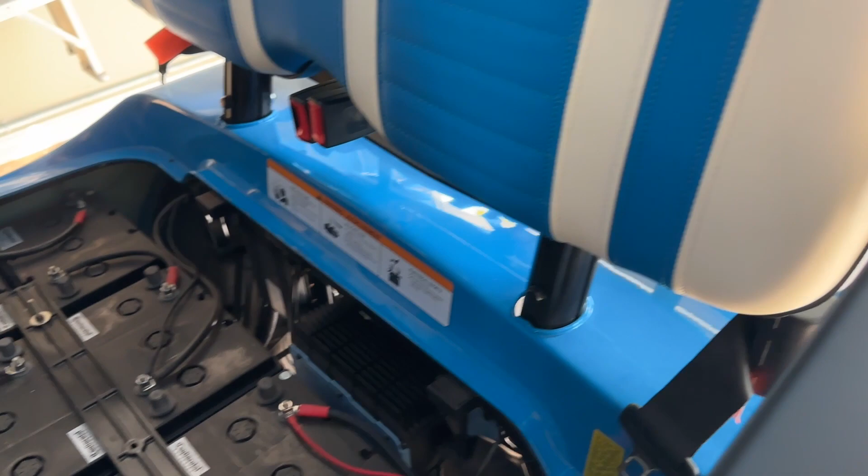So this video is going to be for those guys that want to get a little bit more out of this thing. Open up the back of your battery compartment, buy your cable from the eBay seller in my description, hopefully he's still making them, and plug it in right here, right next to your run-tow switch. You can see the white cable I have here plugs directly into that port.

It's long enough to reach under your seat and through your front seat, and you're going to need a laptop or PC. I find PC is better than the Mac version of the software. Let's go around to this side and I'll show you what you do.

So you plug it all into your computer, and your cable comes with a little piece of paper that says to change your CAN baud setting, your bits per second on the CAN baud, which is right here, to 38,400. This is found by typing Device Manager on your computer, browsing to ports, USB serial port COM3, and in port settings this must be changed to 38,400 or your cable's not going to communicate with your cart. Once you do that, hit OK.

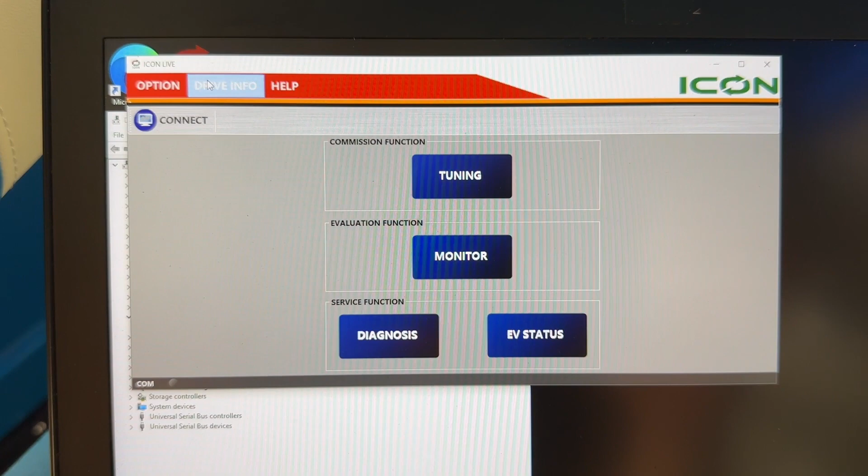Go ahead and turn your cart on. The cart will click on, and now we launch the Icon Live software, which again is another big controversy. You've got to browse Google and forums and everything else to find a copy of this. I guess this is like some secret software you're not allowed to touch. I don't know, it's ridiculous.

So I can't put a link to it because I'll probably get in trouble by the Icon police. Search 'Icon Live software' if you've got a 2022 or 2023 Icon. It's all going to be the same stuff.

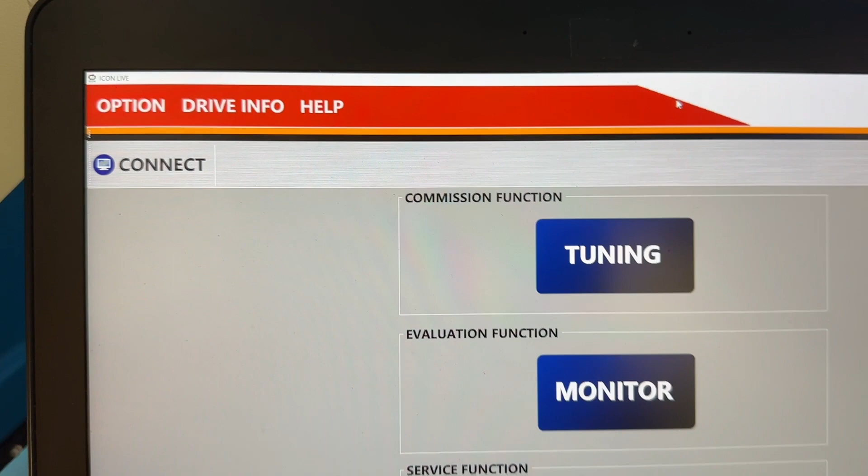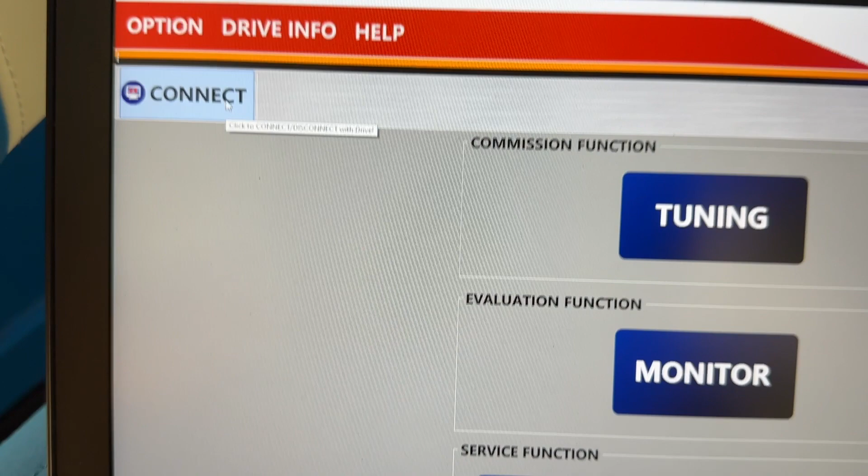Once your software opens up, you'll get to this screen right here. Now you're probably going to be tempted to just jump into tuning or monitor, but none of these things are going to work, and it's going to frustrate the crap out of you. You have to go over here to connect and hit connect first. It'll go from red to green. Right here, down here where it says COM, it means communicating, it is green, it's ready to go. So let's jump into tuning.

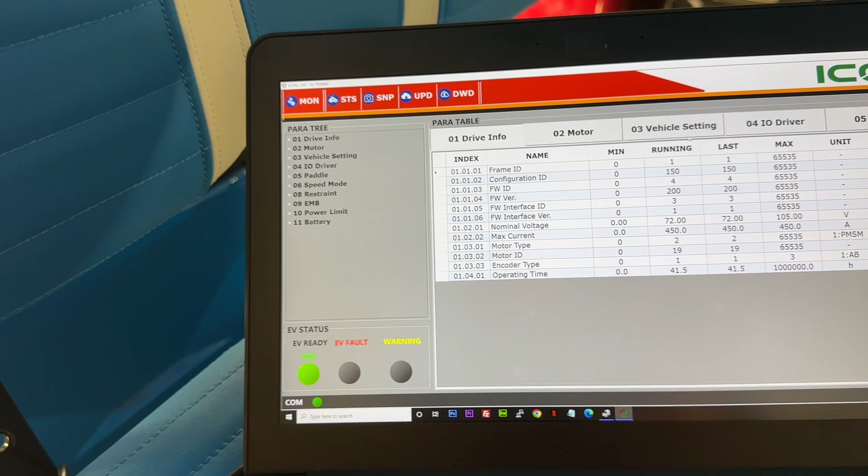You guys are probably watching this video because you want to make your Icon golf cart faster, so I will save you a lot of frustration. You're going to have a bunch of tabs up here, you're not going to know what any of this stuff means, and you're going to start Googling stuff. So I'm going to cut all that stuff out for you.

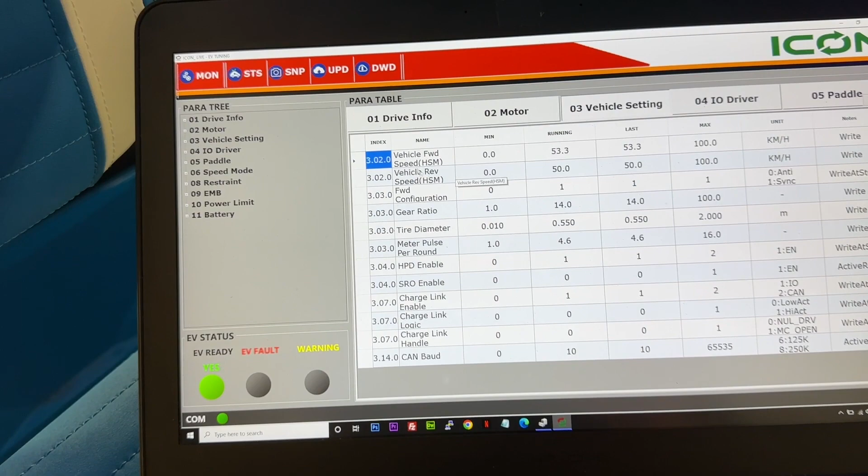Go to your settings, but you're not going to mess with any of your motor stuff. This will brick your cart, so stay out of there. Go to vehicle setting. You are going to change your vehicle forward speed, high-speed motor, and reverse high-speed motor. This is how fast your cart's going to spool up in forward.

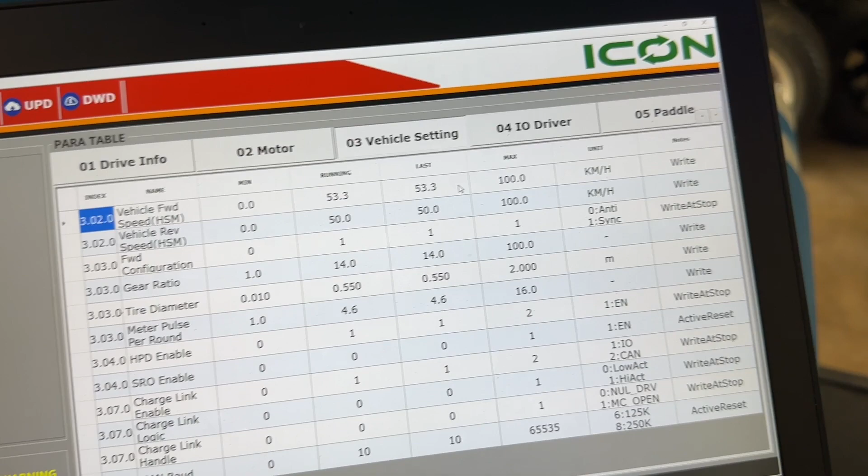They're saying it's set to kilometers an hour, meaning, the settings are silly, like you're going to hit 53.3 miles an hour. The highest you can set this to is 100.

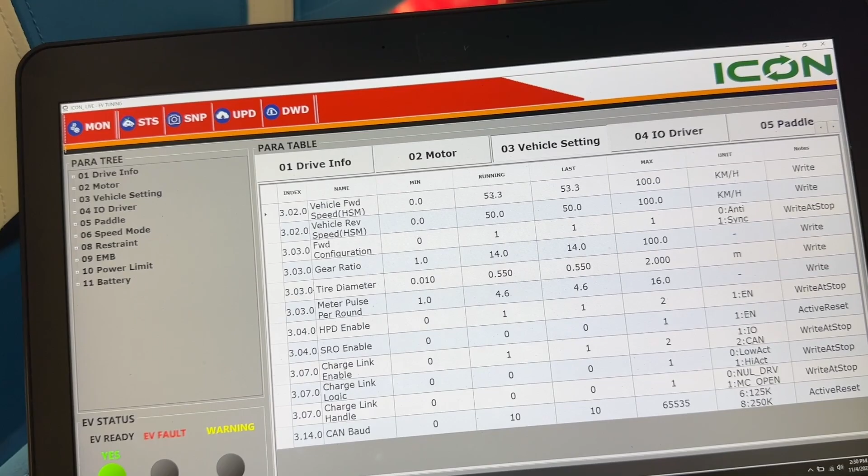So the parameters you're going to change is your running numbers. If I double-click on this, I think from the factory mine was set to like 35, which basically means the cart's going to go like 25 miles an hour. Most of these carts just go 25 miles an hour. First thing you're going to change is change this to 53.3.

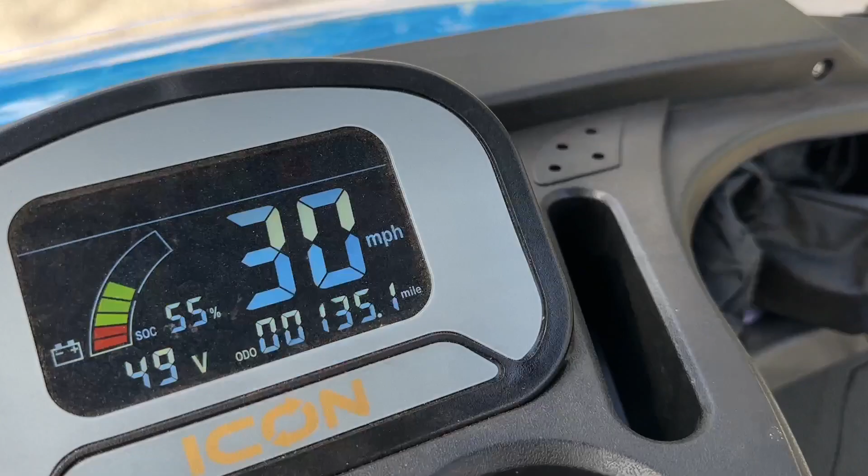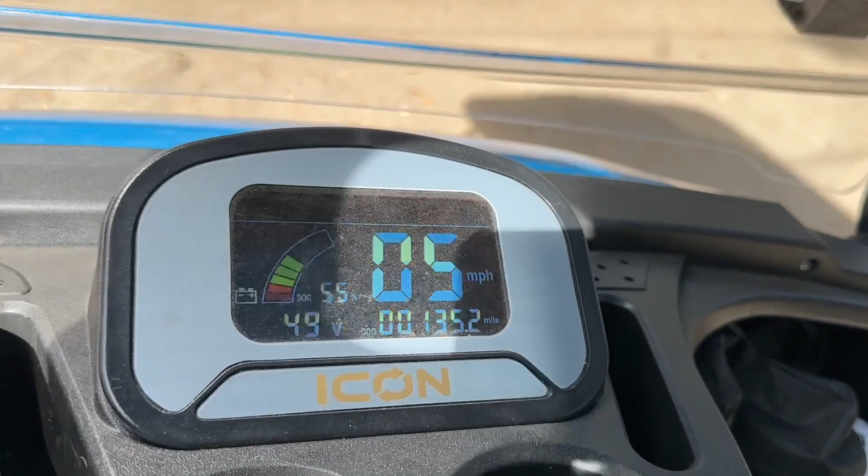As you can see there, I got 30 mile an hour on a longer straightaway. I got about half a battery. You'll get 32, 31, 32, sometimes 33 on a maxed out battery. But again, that's not going to be your common norm.

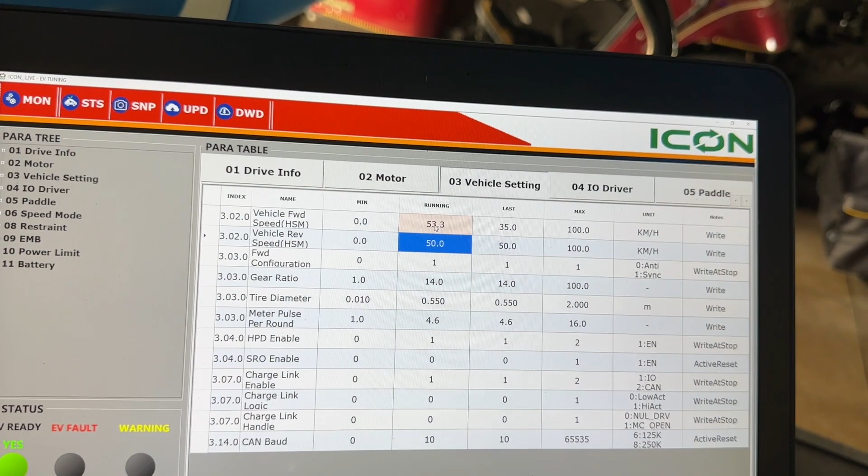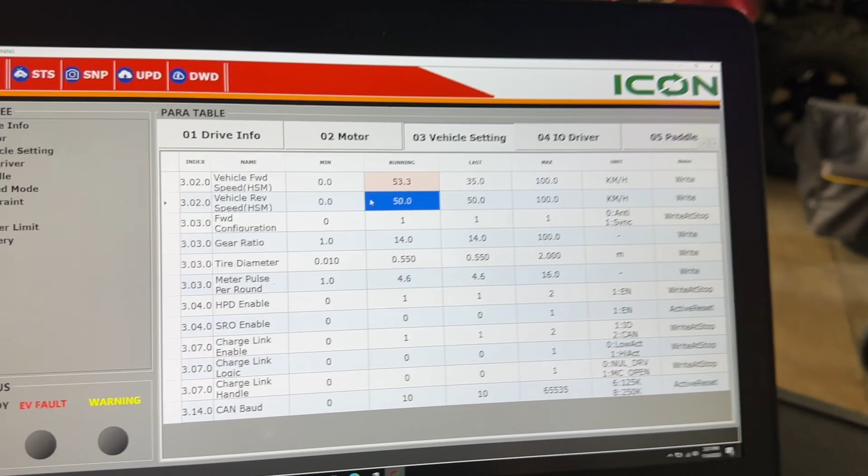53.3, enter, and it's going to turn red. That means that your setting is made, but it's not uploaded. This is a setting that's changed from the last setting, and once you power cycle your key on and off again, it's going to be back to default unless you hit one of these buttons up here, but I'll explain those in a minute. So change your running to 53.3.

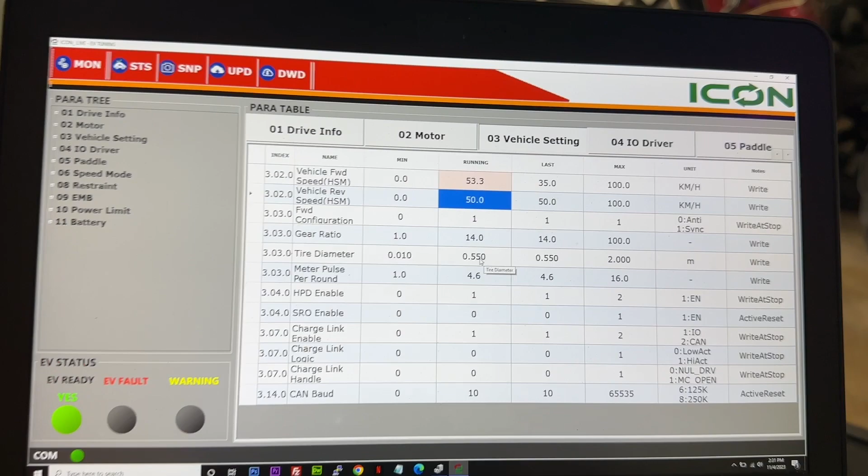You can type in 100, but it's just going to default back to 53.3. Don't mess with any of this stuff, gear ratio, tire diameter, your pulse. Don't worry about any of that. Don't worry about I/O driver. You're not going to be messing with your input and output voltage, so don't worry about that.

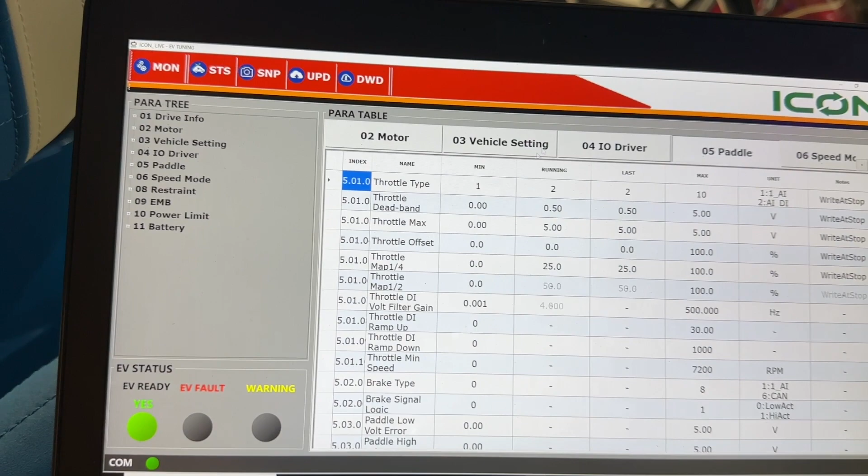Paddle. This is the next thing I changed on mine. Throttle deadband, leave this alone. Throttle max, change that to 5. I think mine was 4. Offset, do not mess with that, that'll break your cart. Throttle map quarter.

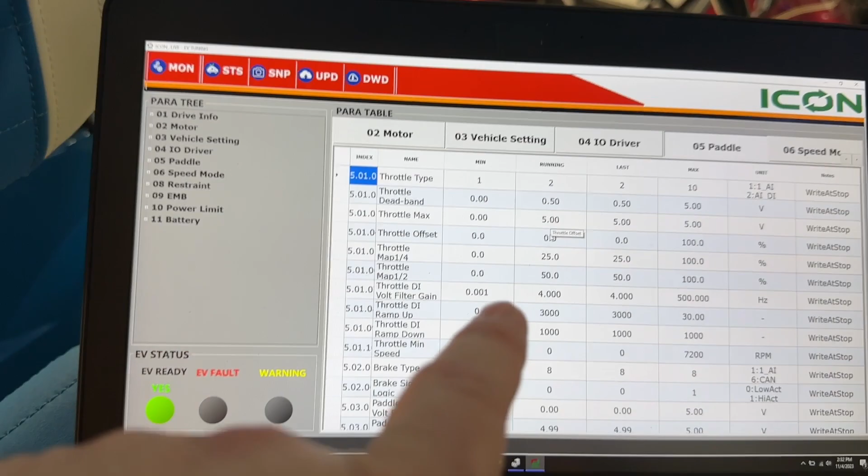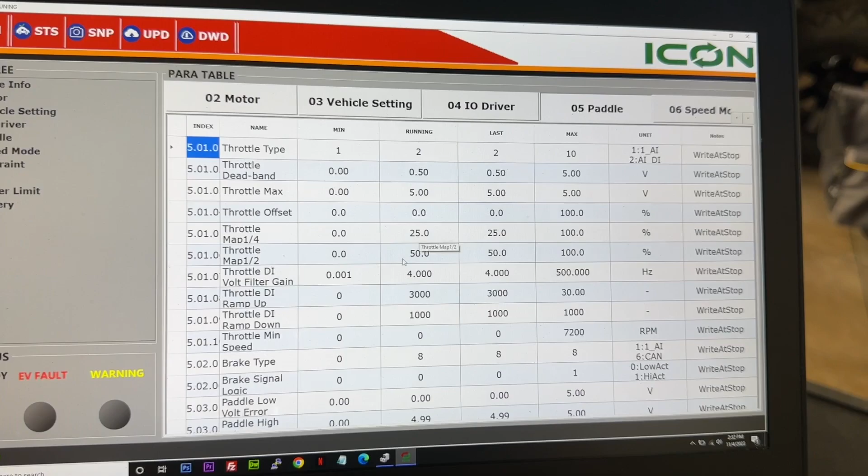Mine was set to 15%. I changed this to 25%. Throttle map half, makes sense, 50%, which is 50. These two are basically, like a DC cart is great, the farther you push it down, it just uses a potentiometer, it changes the voltage throughout the entire band. This uses a computer to do it. So quarter throttle is 25%, half throttle is 50%. So that's basically what that means.

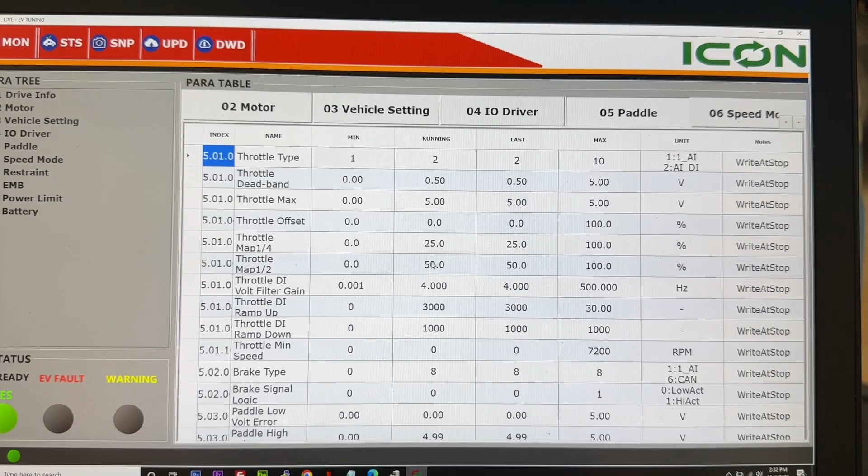So you're going to change those. Take a picture of my settings. This is going to make your cart go 30 to 32 mile an hour. So this is where I have my settings at.

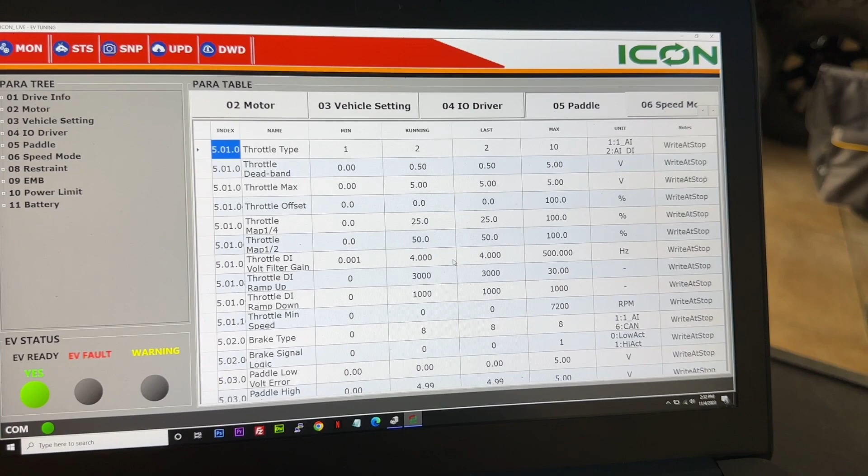Do not mess with this DI volt filter gain, you're going to brick your cart there. I think you can get a little more performance out of it, but I don't mess with this.

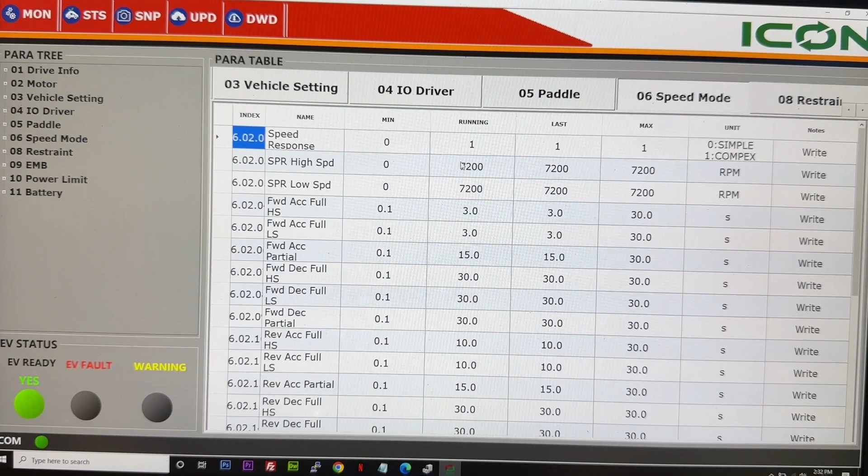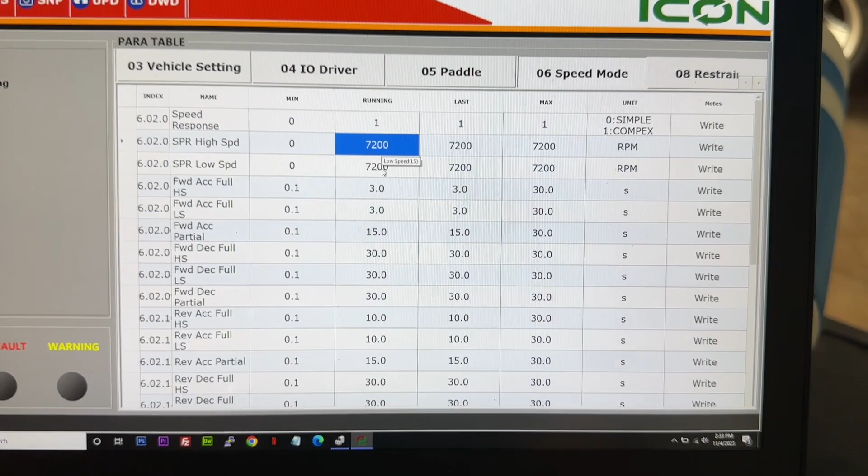Speed mode. This is what I'm working on mine right now. You're going to change your running high speed and low speed RPM. I believe mine was 5,000 from the factory, yours might be different. Change it to 7,200. High speed and low speed are the same on my cart. I don't have a high speed, low speed switch, so I try to make sure that all those parameters match.

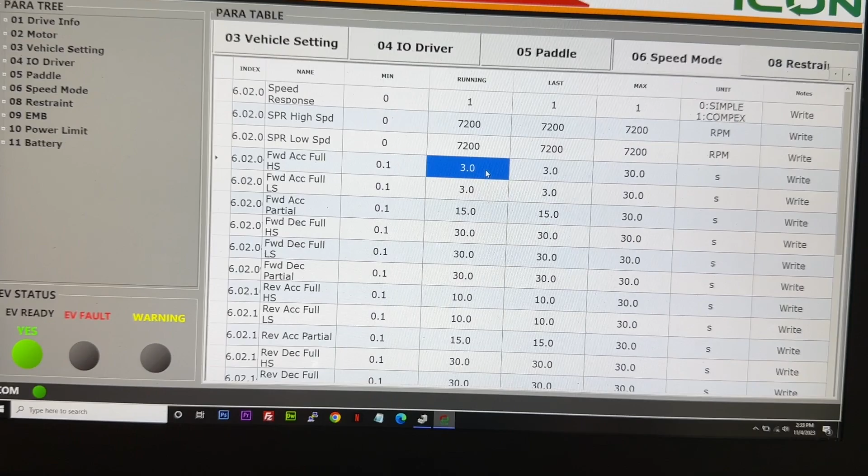So this is your acceleration, this is your performance off the line. When you stomp the pedal, these numbers basically mean seconds.

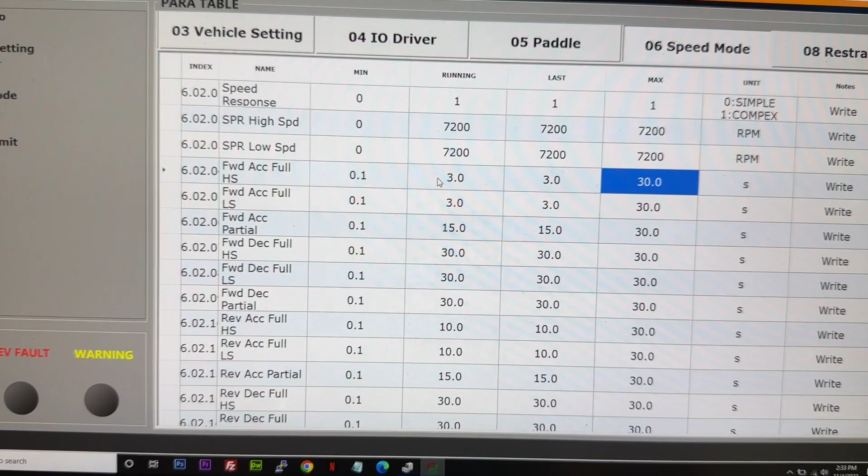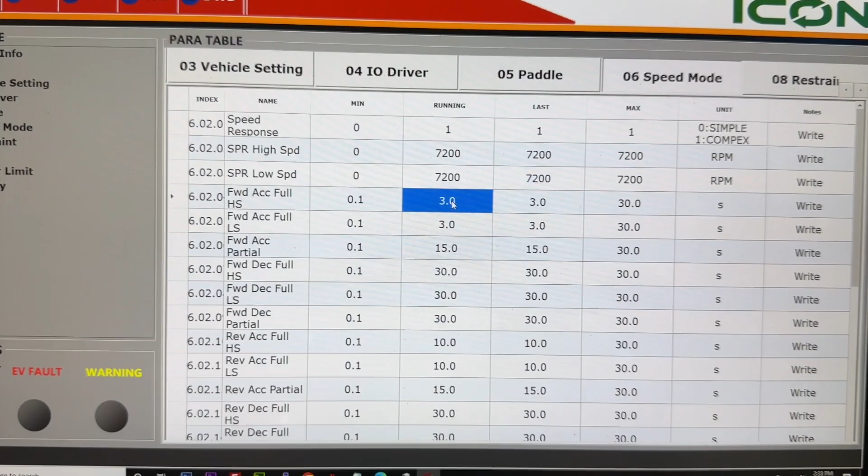So this is the part that was confusing for me, I had to figure this out on my own. 30 is the max, meaning for forward acceleration, full beans, foot hard down, if I set this to 30 right here, it's going to take 30 seconds for this thing to start to try to accelerate to full speed. So it's going to make your cart slower. The higher the setting, the slower your cart's going to be on the input.

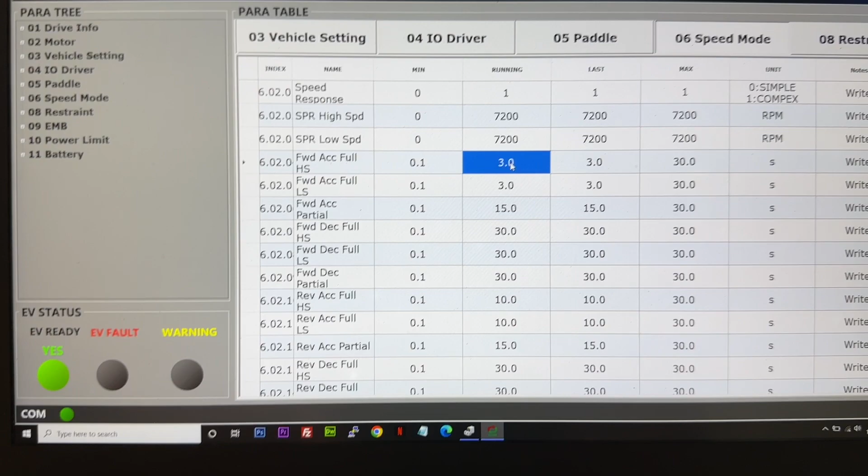So changing it to 3 seconds gives you a really nice jolt off the line. You can really kind of feel that motor hitting you, but it's not so much where it's going to jerk your head back and jerk your passengers around. So I had it set at 1 and it's too jerky.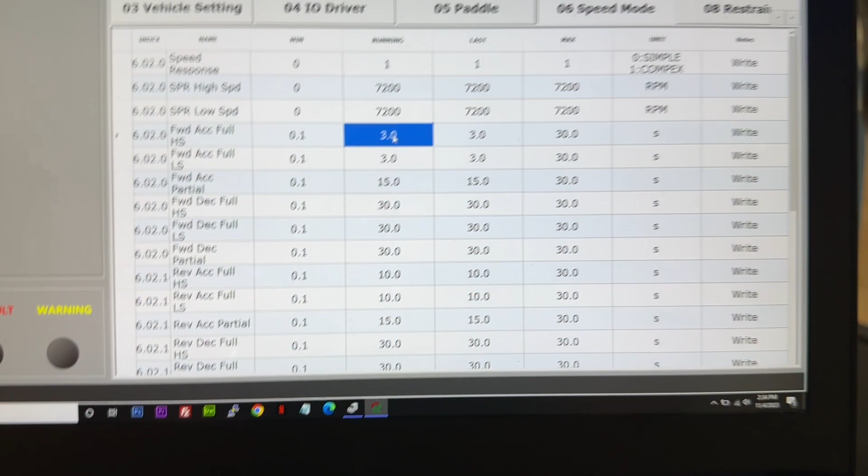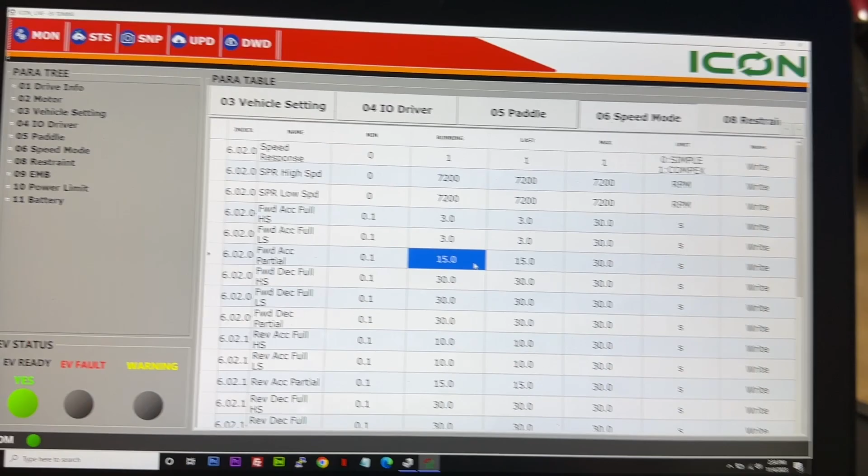3 is a really good setting. I changed acceleration full and acceleration low speed, high speed, HS and LS to 3. Forward acceleration partial throttle—this is how most of you guys are driving your cart around most of the time.

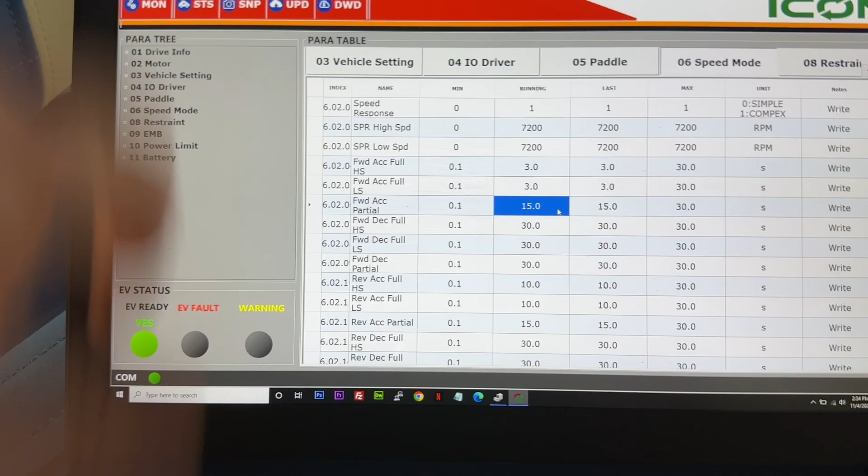Cruising around, a little bit of gas, a little bit of throttle, buzzing around the neighborhood. 15 is a good setting. So this is still going to not feel like a turd, but it's going to move. So 15 on that. These parameters are what I was doing to my cart.

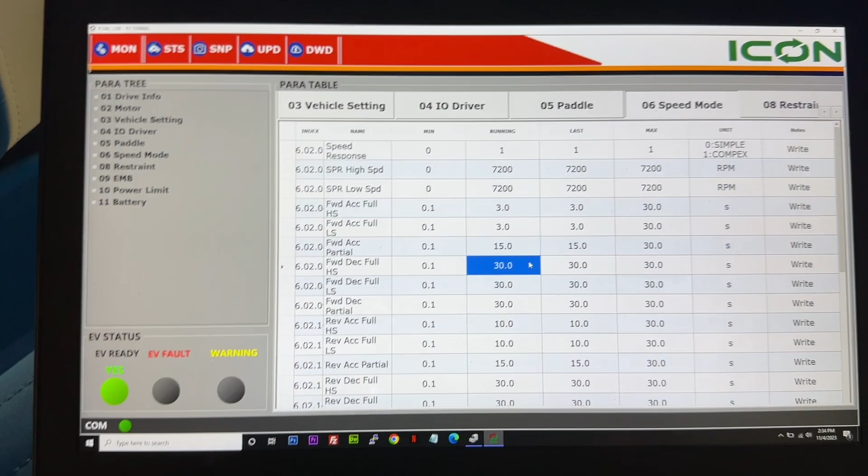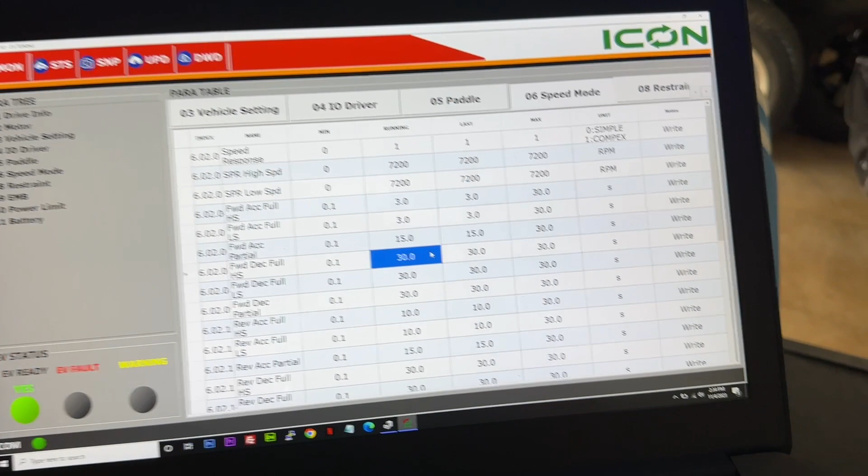I can't stand the automatic regenerative braking on the cart. I feel like you don't get that much more battery out of it, and it's really frustrating because when you drive a golf cart, you just want to relax. When you let your foot off the accelerator, you want to just coast, just like every cart that everyone's used to. These new stupid carts, if you're not constantly doing something with that go pedal, or feathering it, it's going to auto brake for you.

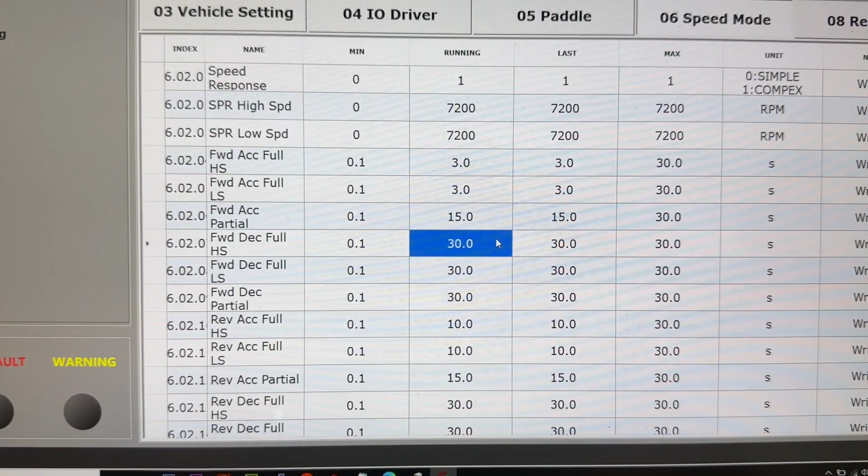The cart has 4-wheel disc brakes, has a brake pedal. The brakes should control the brakes, not the go pedal. I don't want it to stop for me. So I set all of my deceleration parameters to 30, which basically means it's going to take 30 seconds for that auto brake to kick in. So this makes it actually drive like a DC cart.

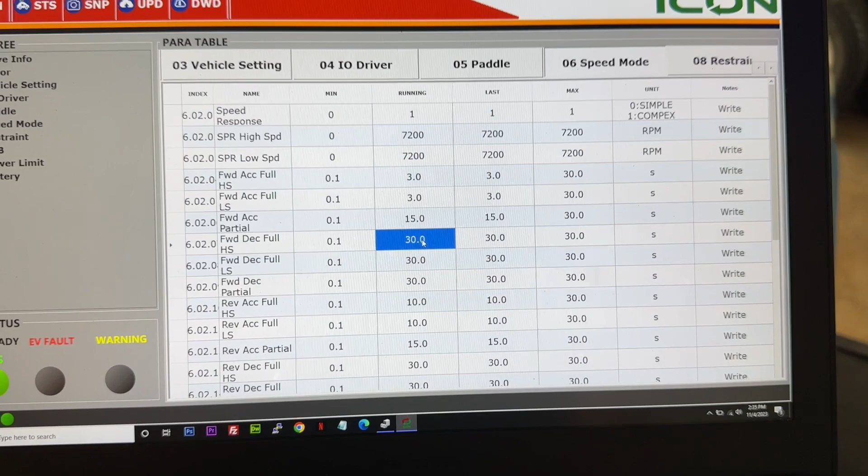You're going to put your foot on the gas, get yourself up to whatever speed you want. You can coast, let your foot off the pedal, and it's not going to just go and slow down on you. So 30 seconds on all the deceleration.

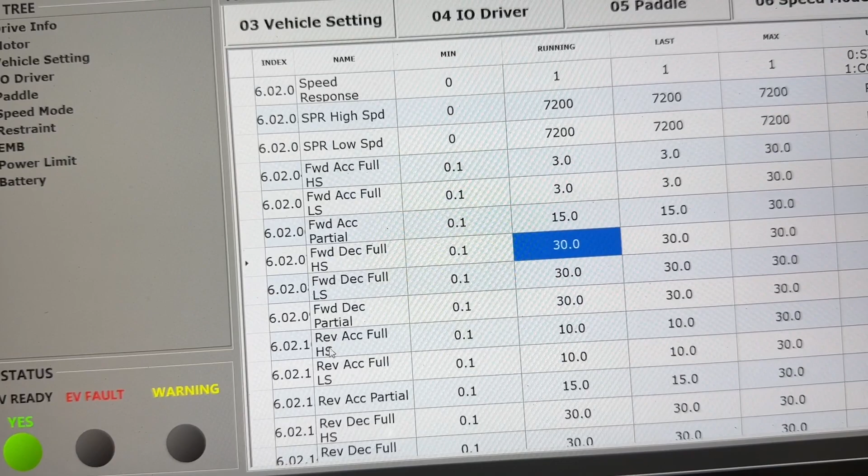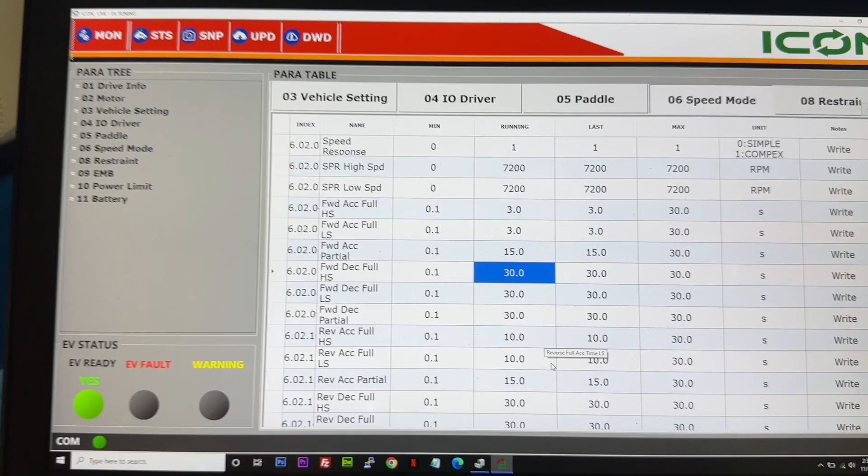If you lower these numbers to like 6, 5, 4, and you go to back out of your garage, the thing's going to take off like a rocket out of the garage. It's unsafe, it's not good—everyone's head flies forward, no good. So 10, 10, 15, I mean, that's more like it. You don't want this thing to go full beans out of the garage because it will move.

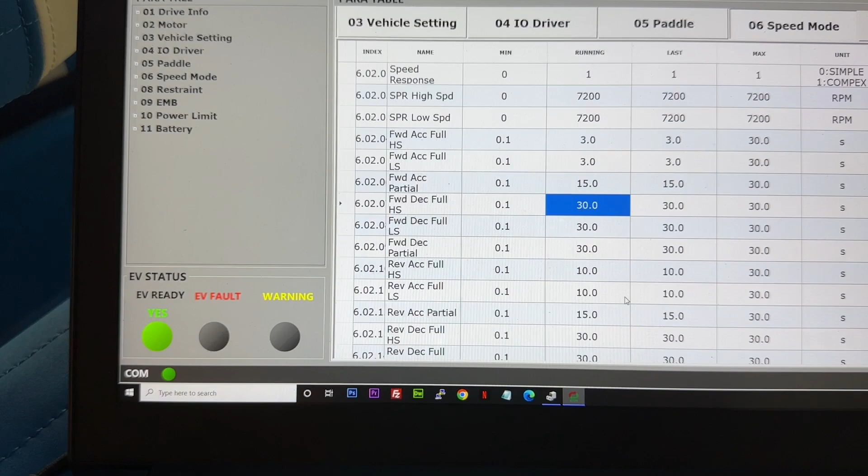So these are the settings that I find to be good, a good driving cart, very similar to a DC cart. I know this video is long guys, but I'm hoping this helps you out.

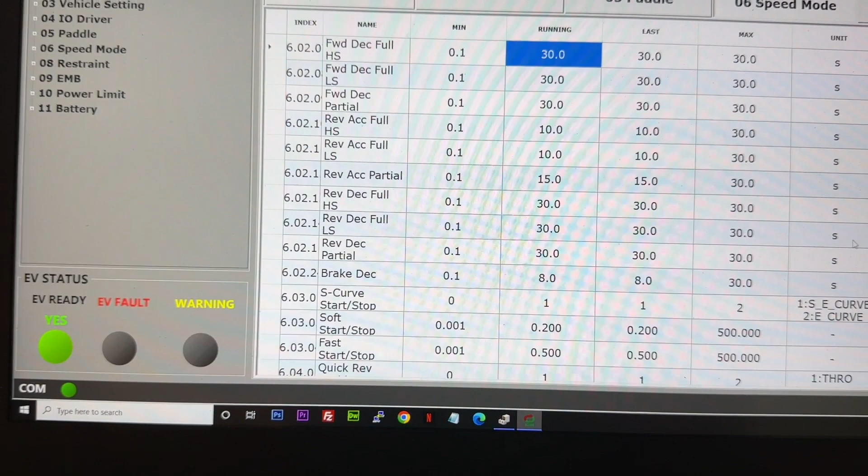Reverse deceleration full and low speed, again, 30 seconds. I don't want this other thing—you're backing out of the garage, right, and say your garbage can's in the way, or your wife says something.

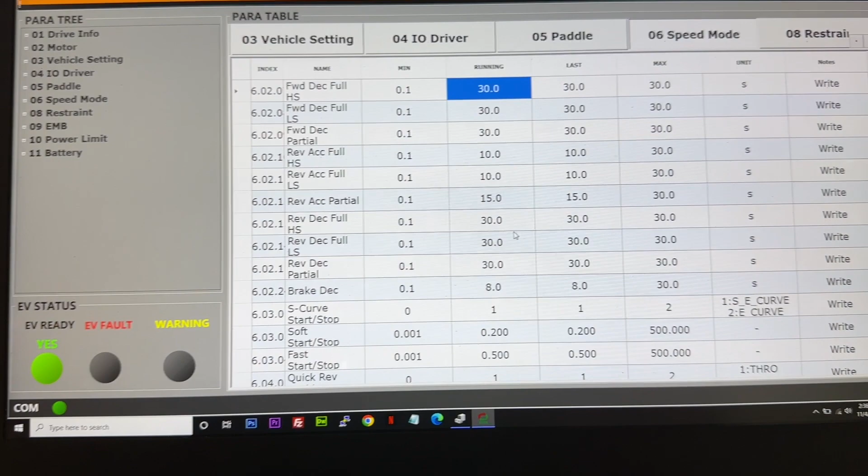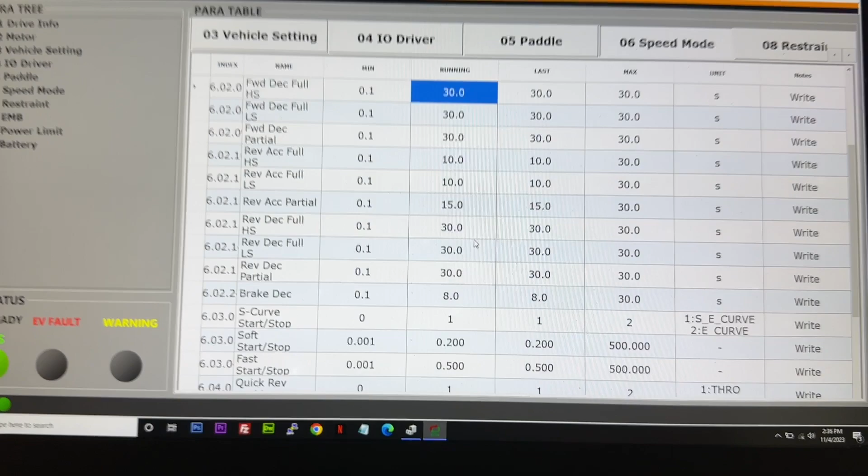Oh, you're gonna stop and pick up the paper, and you let your foot off the gas pedal—the damn thing slams on the brakes. That's silly. I should be able to push my foot on the brake pedal, slow myself down to how fast I want to. So 30 seconds on that. Don't try to stop the cart for me.

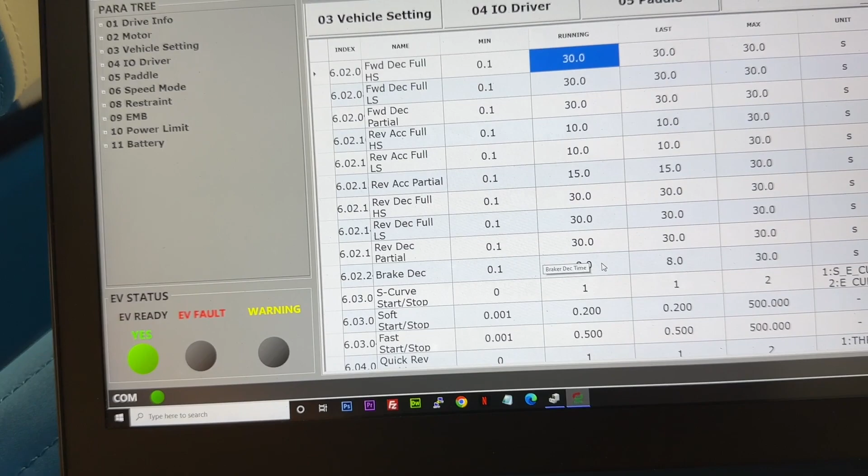Brake deceleration—this basically means the setting when you hit the brake pedal, it's going to give you some assist with the motor to slow you down. This I like, I keep at 8. If my foot's on that stop pedal, then go ahead and help me out with regenerative braking.

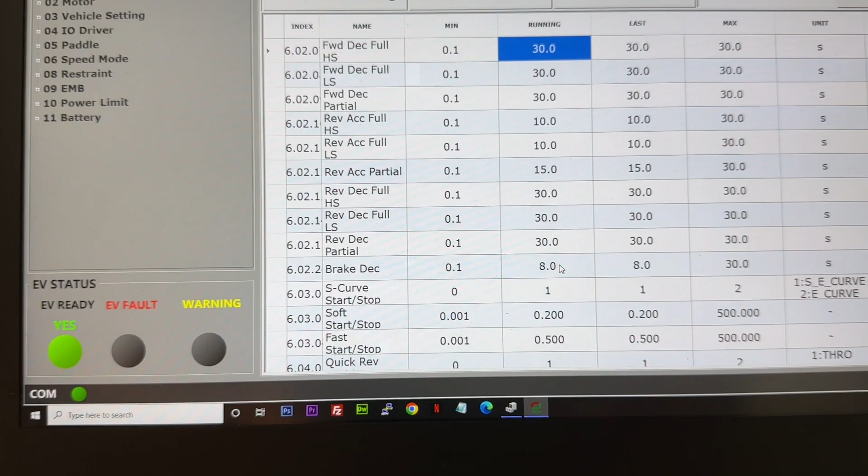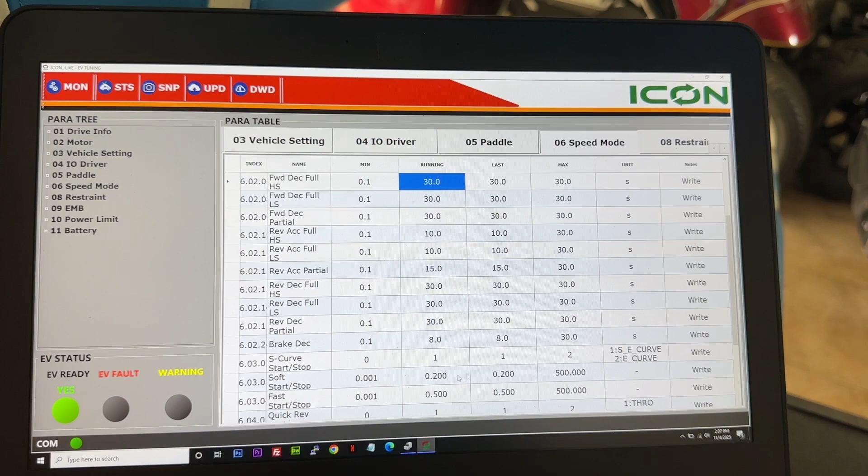I know I was trying to talk fast here—I try not to make this video really, really long. You can mess with your soft start, fast start, and all this stuff, but you're not going to get that much performance out of it. So leave it alone, restraint.

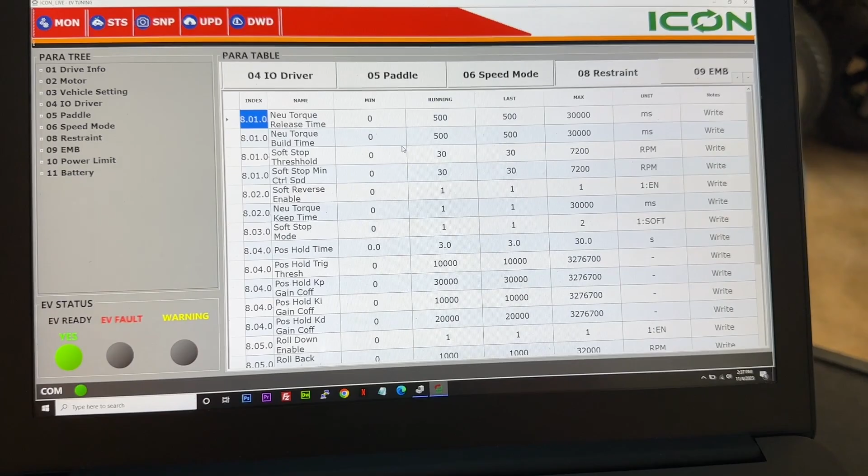This is like how long things take to kick in and kick out. I did mess with these, but I ended up just going back to my defaults on this.

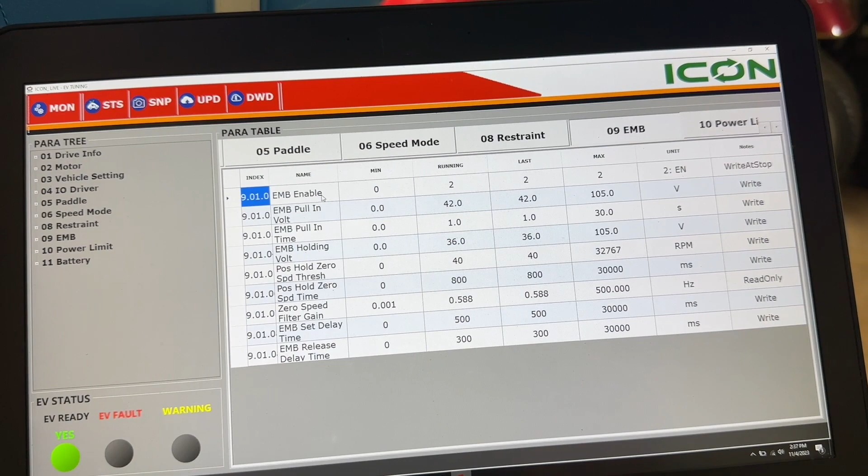Electromagnetic brake—this is when you let your foot off the gas and brake, and it automatically kicks in the parking brake. I thought there would be a nice little setting to completely disable it, so if you wanted to put your own parking brake on here and not have to really use the electromagnetic brake all the time, where it can wear out, because I hear a lot of people their cart gets bricked because the EMB fails.

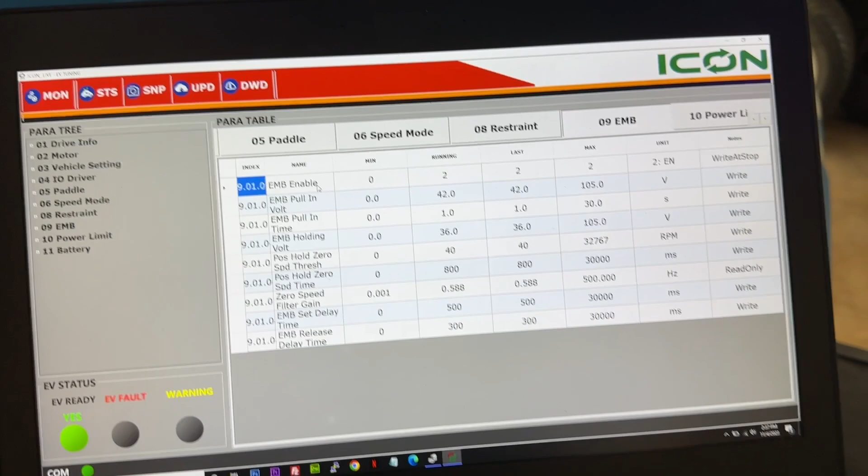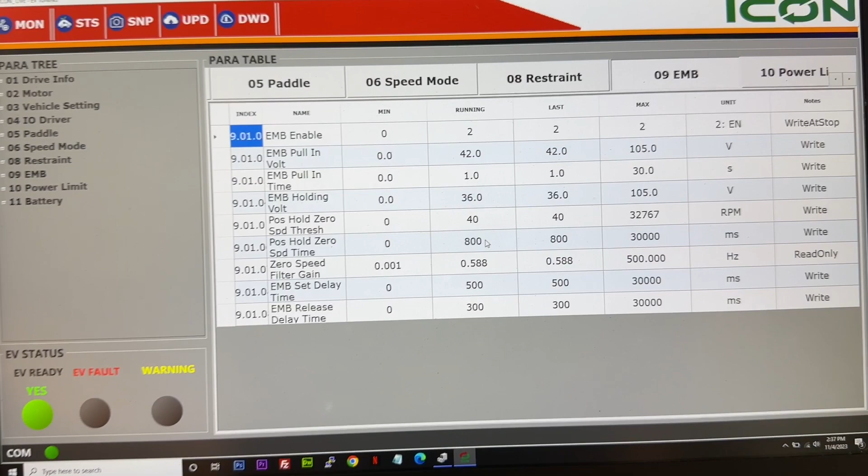You can't turn it off in here no matter what you change. So this just changes the parameters of when it kicks on and kicks off. These times are in milliseconds, so you can kind of tweak yours, but I think the defaults are fine here.

Power limit and battery - this is where people try to change their voltage to get more performance out of them. I'm telling you right now, the settings you've seen on my screen are going to give you 30 to 32 miles an hour.

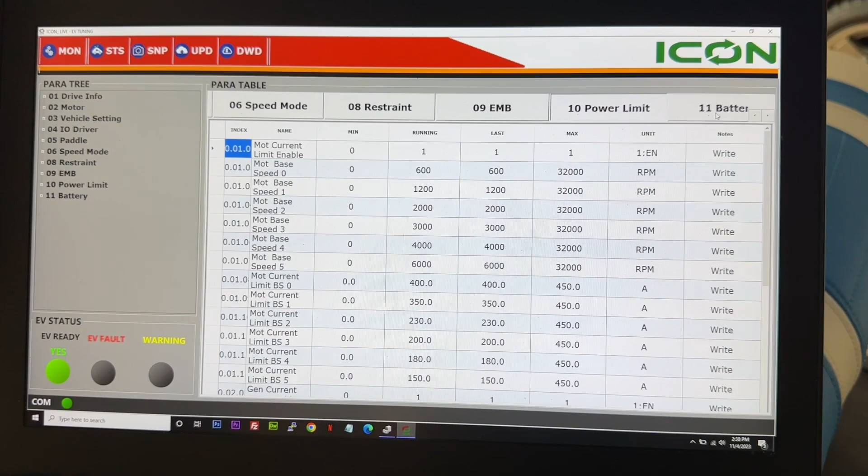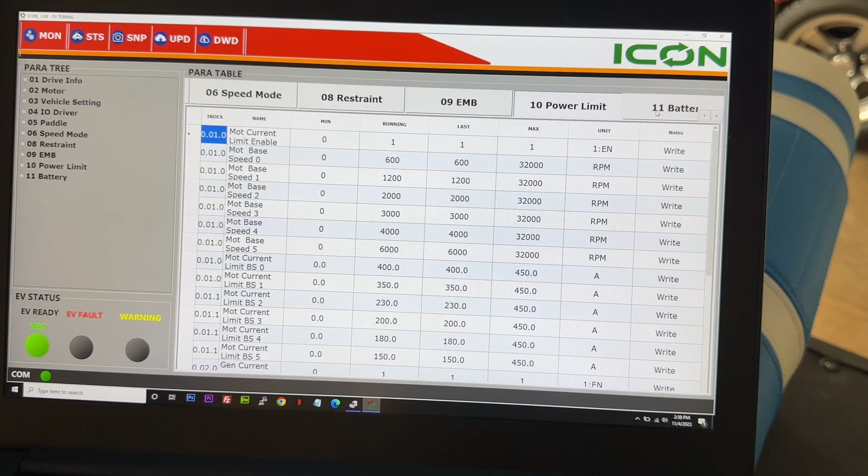You guys take full responsibility for changing your cart. I'm not going to be liable for you getting pulled over or something happens - this is all at your own risk. I think that goes without saying, but I wouldn't change your power settings on this, because that could mess up your motor. Battery, same thing - don't mess around with your current. Leave it alone.

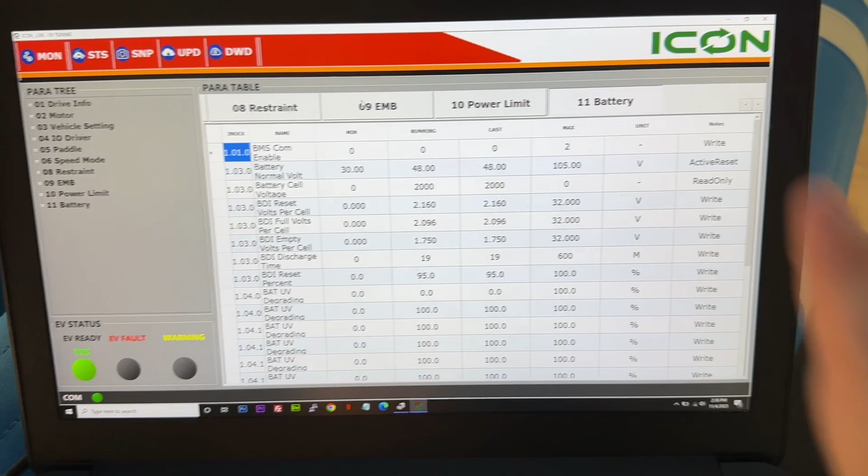A couple key points on this video - I should have put this at the beginning. You're going to go through and make all your settings, and you can do these live too while you're driving your cart around. You don't have to just sit still in the garage - you can make changes on the fly, drive it as you're making changes without hitting upload or download.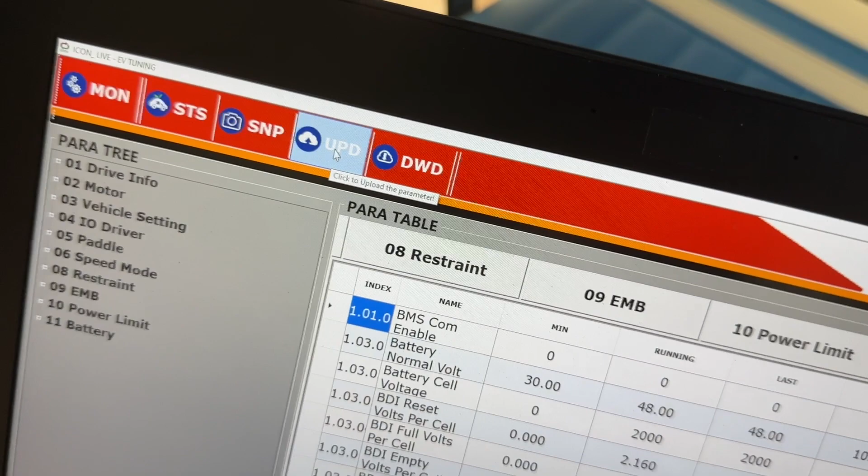But the other goofy thing about this software is that upload basically means download to your computer - download a settings file to your computer.

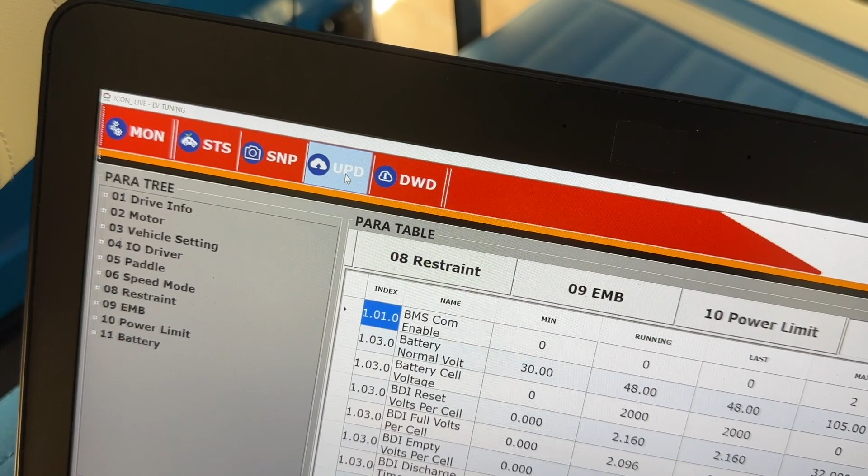So the first thing you want to do when you plug in your cart for the first time, hit this button. It's going to build a file - this is going to be your default Rescue Me file. If you brick your cart and forget what a setting was, no worries, you can hit this button and it will download a default file to your computer.

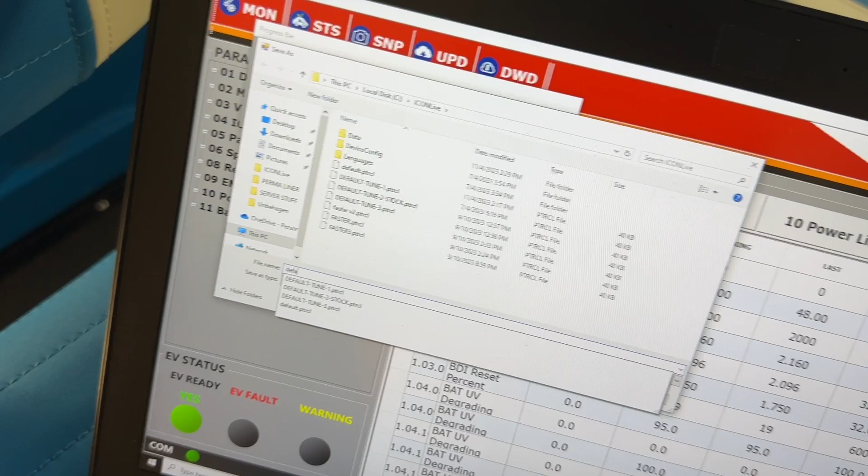I'll show it to you right now. It's going to prompt a window where to save it - here it is, find a little folder on your computer. I called mine Icon Live. Call it default, name it default two, save. Now you've got a base restoration file.

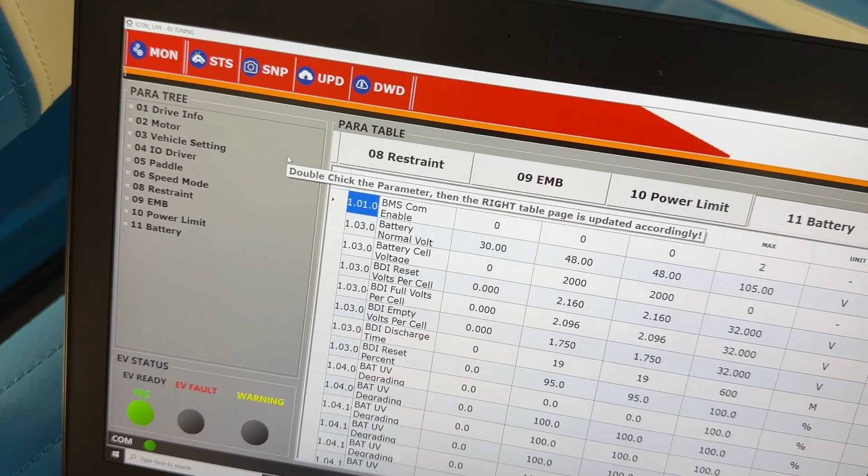So now you can go and make all your changes and screw around with your cart, and if you mess it up, you just upload that file back to your cart and you're good to go.

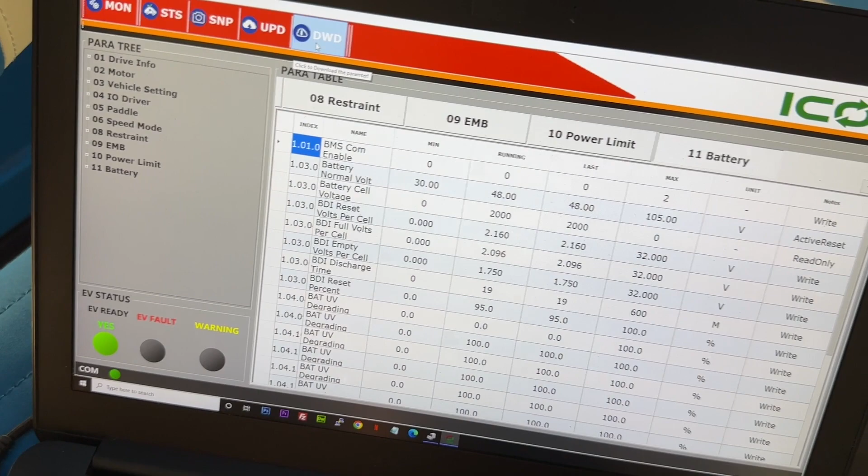When you're done making all your changes, say you've made all your changes like mine, whatever - you're good, you like the way it runs, you like the way it drives. If you just turn your key off, it's going to erase everything you did. You have to hit download. Download means upload, it's silly - it should be upload it to the cart, download to your computer. But download is going to save it to your golf cart.

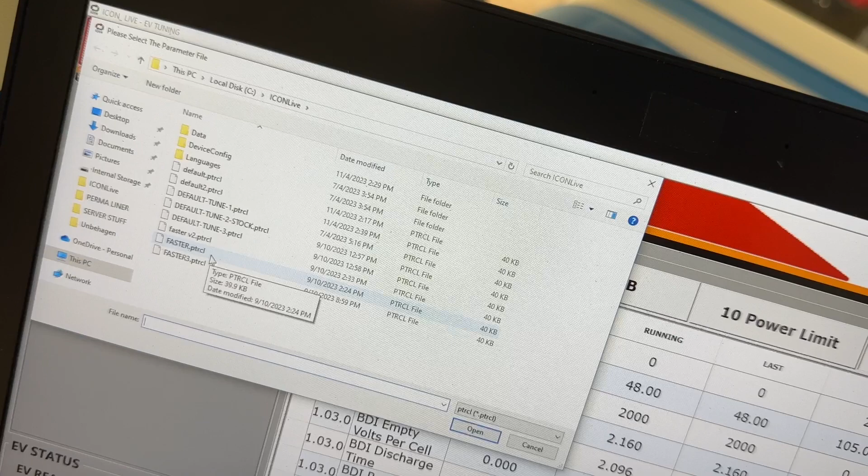So once you hit that, every single change that you made worked. If I hit it again, like say you bricked your cart, you hit download again, now it's going to ask you what file do you want me to push to the cart. This one, Faster 3, which is your base tune - these are all your tunes. Oh, I want it to run this tune for the weekend - hit that, hit open, it'll save it to the cart, it'll run that tune. If you want to change it back, do the same thing. So that's how you save your cart if you brick it.

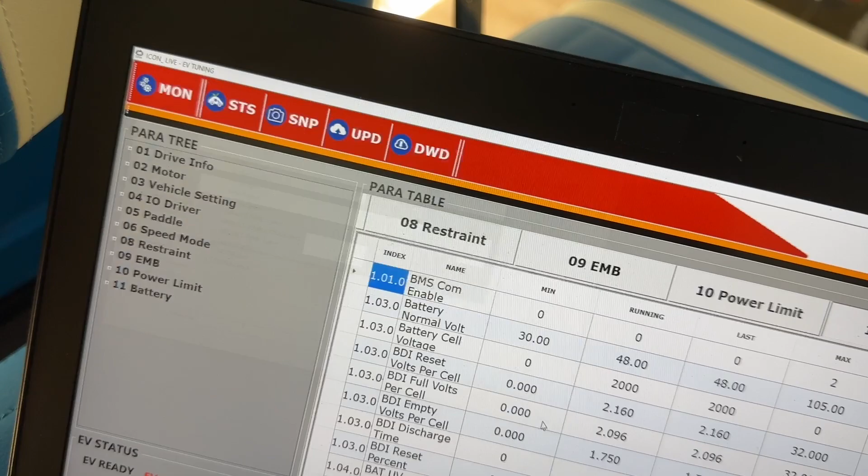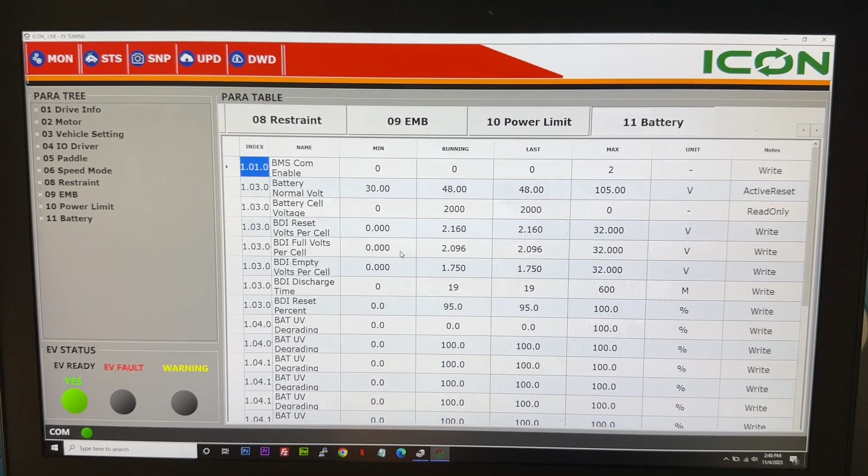So I really hope this video helped you guys out. Unfortunately it's almost a 15-minute long video, but this is how you use the Icon Live software with your Icon EV golf cart. I don't know why they make this such a secret - this should just be in the owner's manual, and they should give you the option to tweak your cart the way you want to.

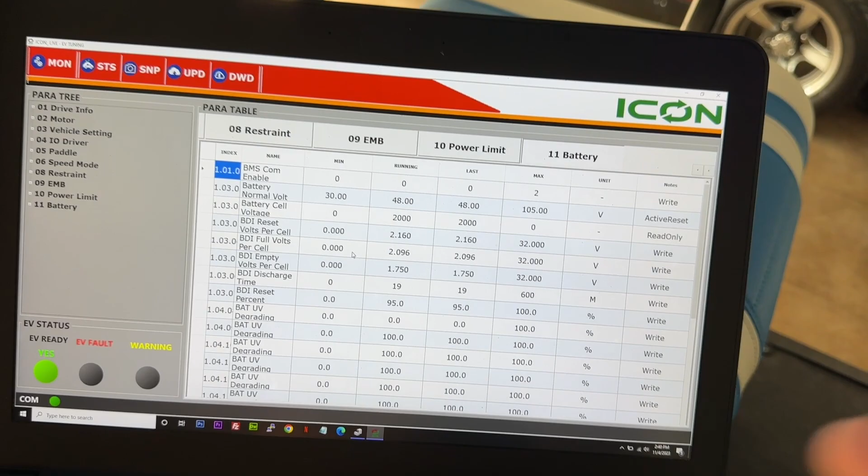There was nothing wrong with this technology - they work. You never had to do any of this stuff to get these things to work. You put the motor in, you put the batteries in, and the damn thing goes as fast as it can go. I don't like all this stuff, but this is how things are now. So hopefully this helps you guys out, get a little more control over your almost $15,000 investment.

Again, you assume all responsibility and liability if you screw something up. This is just an educational video to teach you how this stuff works, what it looks like. Please change these settings at your own risk.